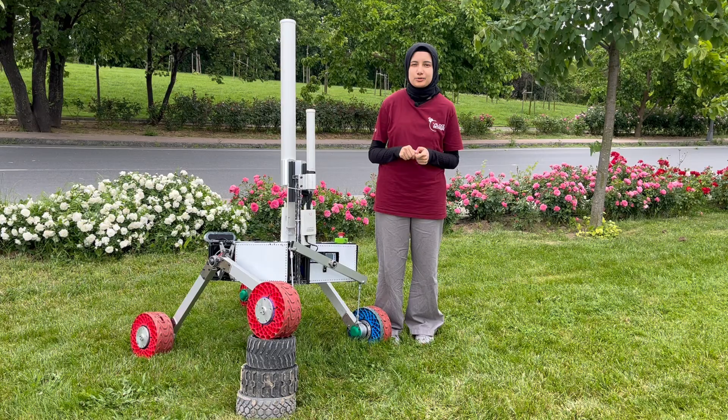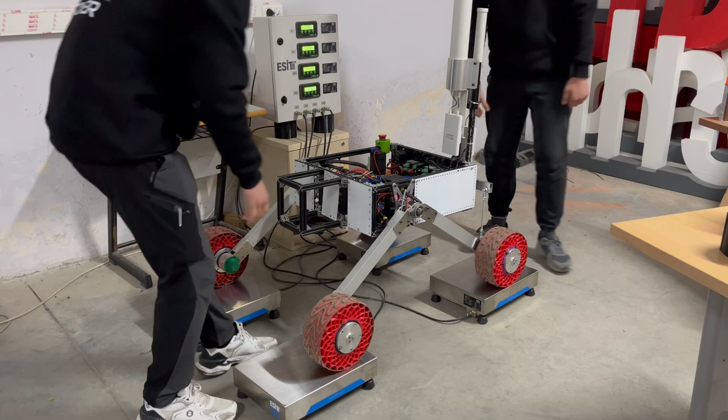The rover chassis consists of T-slot aluminum profiles, providing lightness, durability and easy modification. The vehicle is about 1100 in length, 1500 in height and 900 mm in width. The rover's weight is 36 kg and along with the mission-specific installed systems, the weight increases up to 58 kg.

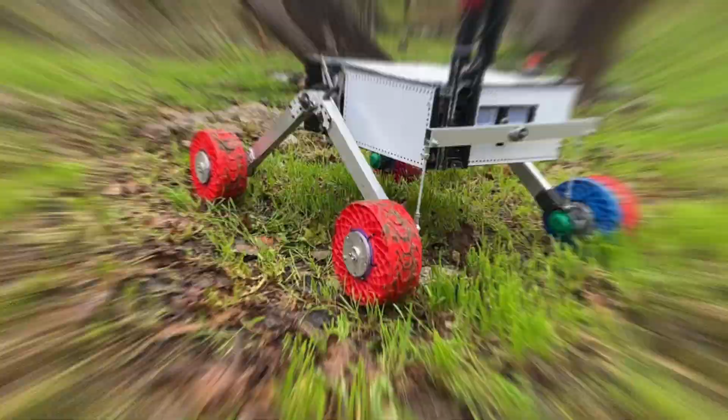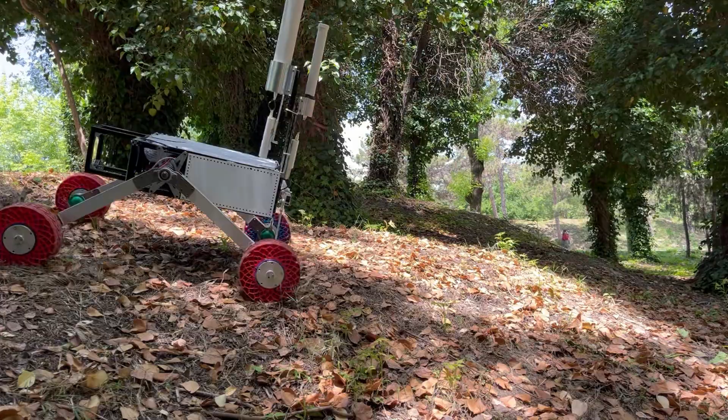Positioned at the rear, the differential bar in the rocker suspension system is made of aluminum profiles to guarantee high bending strength and rover stability. This design choice contributes to a more balanced ride with reduced force exposure. The rover exhibits the capability to climb up to 45 degrees slope with airless TPU tires and brushed DC motors generating 20 Nm torque. The drive system enables the vehicle to skid steer, turn with minimum vibration and traverse harsh conditions safely and smoothly.

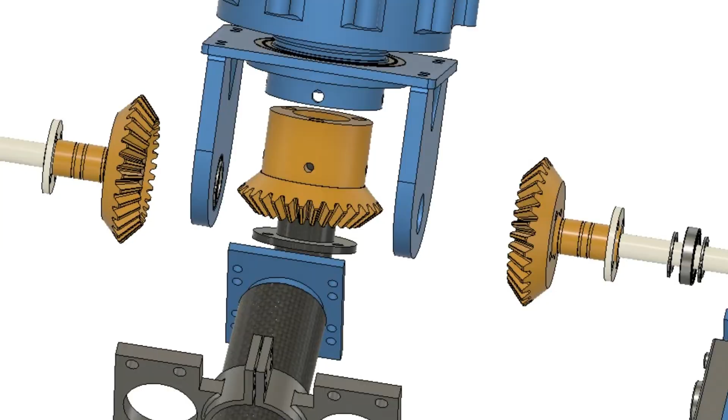The 6 degrees of freedom robotic arm that utilizes a combination of brushed, brushless and servo motors is composed of aluminum profiles, carbon fiber tubes and PLA materials to reduce the rover's overall weight. The robotic arm, measuring 1200 mm in size and 9.5 kg in weight, has the capability to reach 1000 mm to either side, carrying loads up to 5 kg.

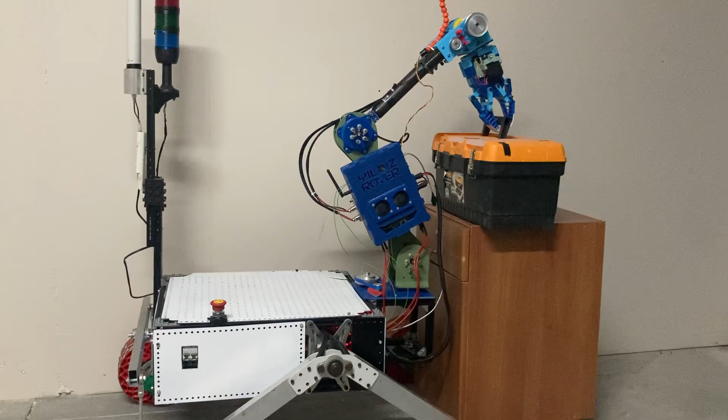A cycloid drive made of aluminum providing the main power reduction. A differential bevel gear which ensures both the turning and the upward and downward rotation of the 4th and 5th axis, manufactured from cast polyamide. And finally, a belt pulley mechanism made of TPU.

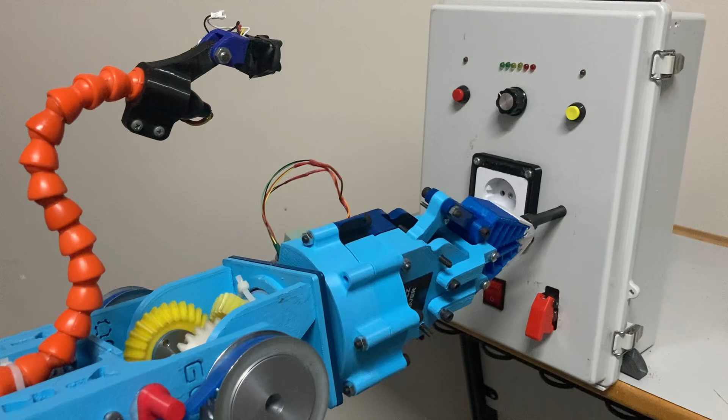2 different gripper systems were designed for different purposes and can be easily switched between tasks due to their easy-to-assemble feature. Both gripper systems are connected to the robotic arm with a bevel gear and can provide full rotation. Firstly, an adaptive gripper with flexible TPU fingers is used to ensure both parallel and rounded grip, along with wide grasping ability. The fingertips are sufficiently hardened with PLA to prevent slipping that may occur due to the slippery nature of TPU. Thanks to the interchangeable fingers, scoop-shaped fingers are used to collect samples during science mission.

The second gripper mechanism is specially designed for various tasks to carry objects up to 250 mm wide by moving parallel fingers. By dint of this parallel gripper, bolts can be built during construction tasks.

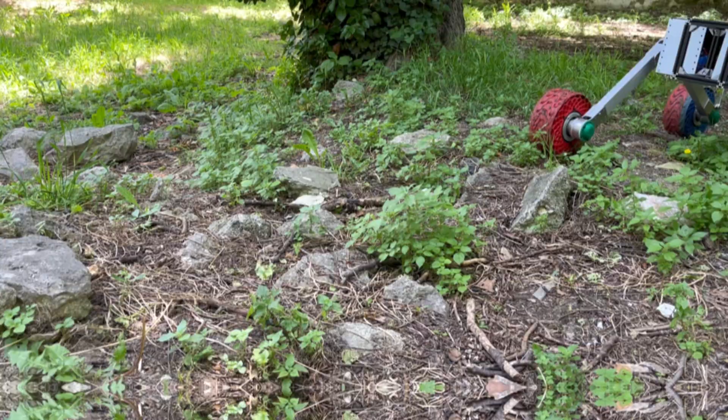We chose a 6 serial 13 parallel Li-ion battery pack to safely provide sufficient current and voltage to all electronic equipment in the rover's electronics box. For safety, we used a battery management system, which protects the battery from undesirable conditions.

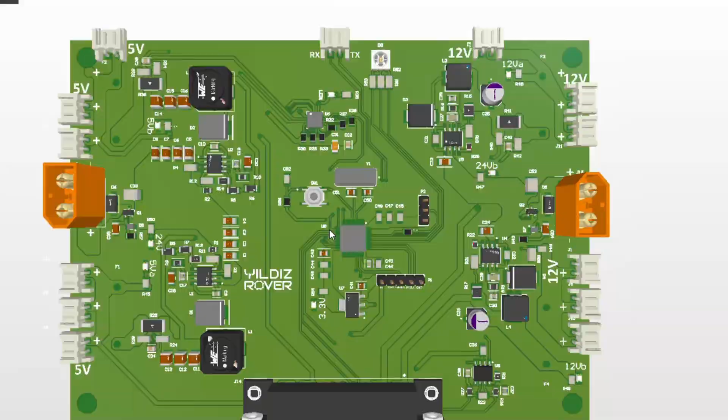We designed custom-made PCBs, such as power distribution, motor driver, robotic arm, switching, and encoder, with STM32 series microcontrollers on them. The power distribution board has features such as reverse polarity protection, an INA current sensor, and fuses at the power outputs. These designs provide overall reliability, better control, and durability to the rover.

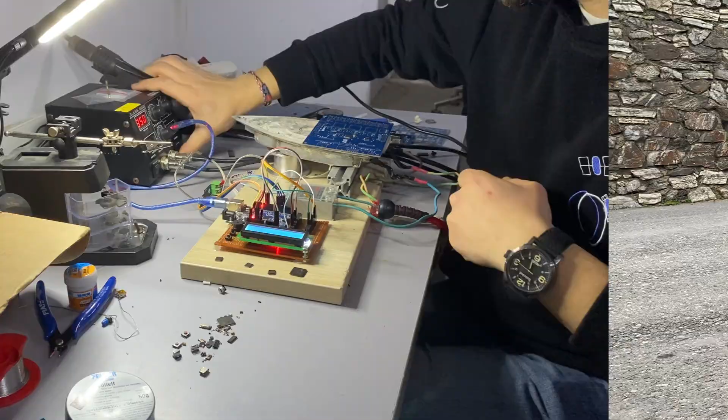Considering emergency scenarios, an easily accessible emergency stop button has been placed on the rover, which can unconditionally shut it down. CAN bus and UART protocols were chosen for wired communication in the rover.

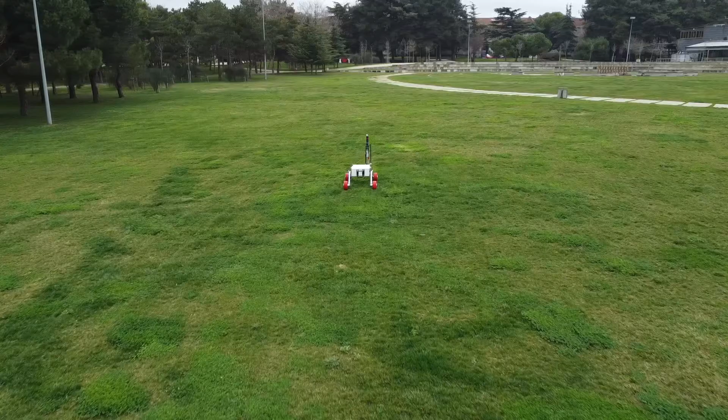A 2.4 GHz omnidirectional antenna was used for long-distance communication between the rover and the base station, and a 5.8 GHz omnidirectional antenna was used for massive data transfer.

We improved our previous work based on deep reinforcement learning-based autonomy with 3-dimensional analysis support, so we can easily travel in rugged and sloped conditions. We simulate and train using ROS and Unity under terrain suitable for the competition. Thus, it can work quickly and instantaneously from point to point in all conditions.

In order to increase the recognition performance of markers, a model that generates fake datasets with markers visible at long distances and a control algorithm that will check that these data are detected with the same accuracy for certain periods of time have been studied. When the ArUco tag is recognized, the other state flag required for autonomy is triggered and the approach algorithm runs.

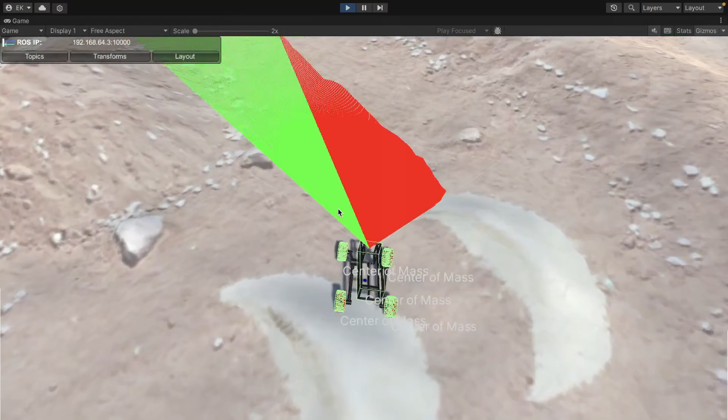The rover's localization system consists of our algorithm based on RNN architecture, which we call Modular Deep Sensor Fusion. This can produce position accuracy even when GNSS is eliminated, using data from depth perception, IMU, and wheel encoders, whichever data is still coming. When GNSS is used but there is a success rate problem, it can improve its accuracy.

The training data set required for the RNN architecture was created with data obtained both by determining ground truth on the vehicle in real life and by producing noisy sensor data in the Unity simulation environment.

The arm software stack combines the edge transformations and inverse kinematics calculations analytically and numerically. Also, it was tested and verified in the Unity physics environment with the PID algorithm on the Arduinos by communication with ROS, or image processing algorithms adding support for semi-autonomy.

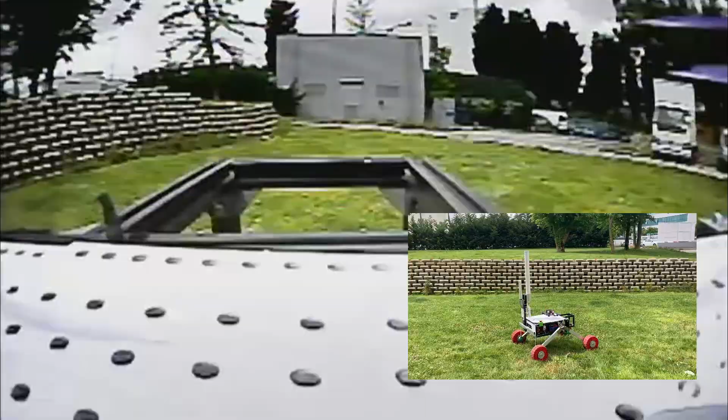We used a custom-built quadcopter drone to enhance exploration operations for science missions. Its primary purpose is to capture images of inaccessible terrain, which will be vital in the development of scientific hypotheses. For safety, it has an automatic return home function.

The science team has been working on the geological and mineralogical formations of the selected area. The Valles Marineris region is studied for its tectonic features, ice, alluvial fans, and crater formations. In order to examine the area thoroughly and determine the most suitable landing site, we used JMARS and observed the rock and mineral types in the area.

The science mechanism is equipped with analysis devices and is capable of exploring the area by conducting experimental analysis on several rock types, examining the fossil traces and possible habitable signs. A near-infrared reflectance spectroscopy is specifically selected to conduct measurements in higher nanometer ranges, using image processing that transforms the spectra into wavelength.

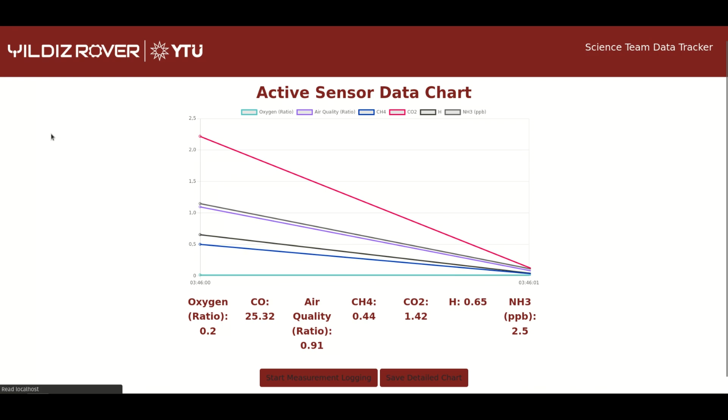To determine the conditions of an unknown environment, we use our gas sensors to detect crucial atmospheric gases such as carbon dioxide, hydrogen, oxygen, and ammonia, shedding light on our studies. We use a drill mechanism to accomplish the deep sampling requirements and reach a depth of 30 centimeters in the soil. As for surface collection, the soil is collected by the gripper using caching mechanisms, scoop-shaped fingers, then poured in the container.

The conditions of the soil are determined by our soil sensors, encompassing the most fundamental nutrients such as NPK, as well as pH levels, humidity, temperature, and methane gas emissions. Additionally, a digital microscope is employed to examine the sedimentary characteristics of the rocks. Our rover is capable of constructing a wall following the requirements by using materials provided at maximum height.